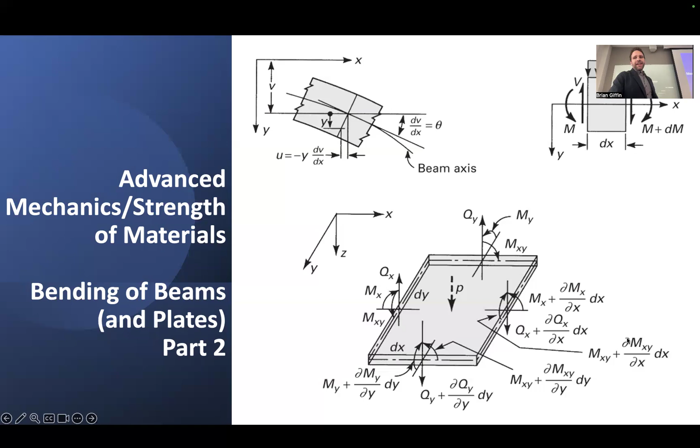And I want to just recall some of the things that we looked at in the context of idealizing these beam and plate theories, simplifications of the more general theory of elasticity. We looked primarily at, if we're really only concerned about deformations of beams and the cross-sectional deformations are really not so relevant, then it suffices to just look at what's the deformation of, let's say, the centroidal axis or the neutral fiber of some beam, and we can parameterize that in terms of some axial coordinate x, and we can represent its transverse displacements in these two transverse directions, y or z, as a function of axial position x.

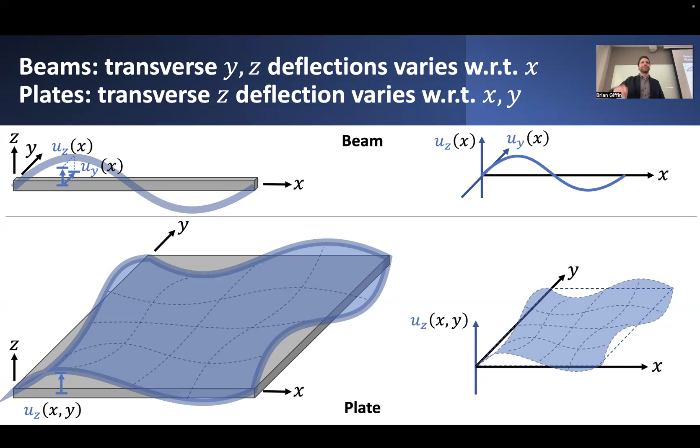In the case of plates, all we had was this transverse deflection in the z direction, but which varied potentially as a function of the in-plane coordinates of the plate, as functions of x and y. So really what these functions represent are deformations or deflections of the midline or the centroidal axis of this beam and the mid-surface of this plate. Not necessarily saying anything about what are differential displacements of points on the top surface or bottom surface. Really, when we're characterizing relatively thin beams or plates, we can just isolate attention to what's happening to the neutral fiber or the mid-surface of a plate.

From those descriptions of what's happening to the neutral fiber or to the mid-surface of these plates, we could describe what that deformation looks like, maybe in profile, and we could characterize different aspects of how these transverse deflection fields varied as a function of either axial coordinate or in-plane coordinate. We could take derivatives of these quantities to compute things like what's the slope of this deformed neutral fiber of this beam, or what's the slope in maybe both the x and y directions of this deformed section of the plate under these different forms of transverse deflection. And we could also look at what's the resulting curvature of these small sections or segments of a beam and plate under these different loads.

So we could define things like overall inclination or slope. We could then relate that to the resulting curvature in these beams. And we could define them basically as derivatives of these transverse deflection fields. And principally, we invoked this assumption of plane sections remain perpendicular to the neutral fiber in the case of Euler-Bernoulli beam theory in order to relate the resulting rotation of a given section to this transverse deflection field. And we enforced that assumption by basically insisting that transverse shear deformations that might occur internal to this beam are relatively small.

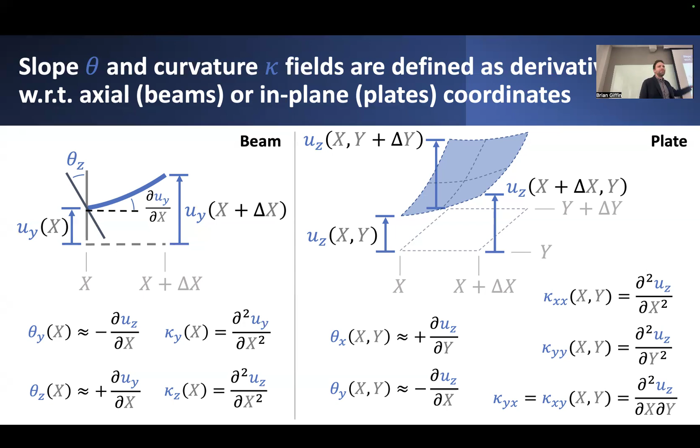And in that way, we were able to relate the rotation of a given section or the rotation of a given fiber in a plate to the resulting slope or inclination of this beam or plate. And once we had those relationships, we could go one step further and finally establish our final kinematic relationships linking the resulting curvature of a given beam or curvature of a given plate that involves now 3 different curvature quantities.

We could relate curvature now to how strain varies through the depth of a given beam or plate. In the case of beams, we noticed that the axial strain in any given fiber, measured using some kind of relative distance from this neutral axis, we could measure what's the strain in this fiber given its coordinates, and it can be expressed as basically a linear function that depends on the curvature. Both values of curvature in bending due to displacement in either of the 2 transverse directions.

In the case of plates, we found that it wasn't just axial strain that we were interested in, but rather we were looking at this more general case where we might have, let's say, a small chunk of this plate. We can cut out of it some kind of cube, and we can look at any particular slice of interest through the depth of this cube. And we noticed that on a particular slice, that slice will undergo some kind of in-plane strains, axial strain in the x direction, axial strain in y, and maybe also some shear strain.

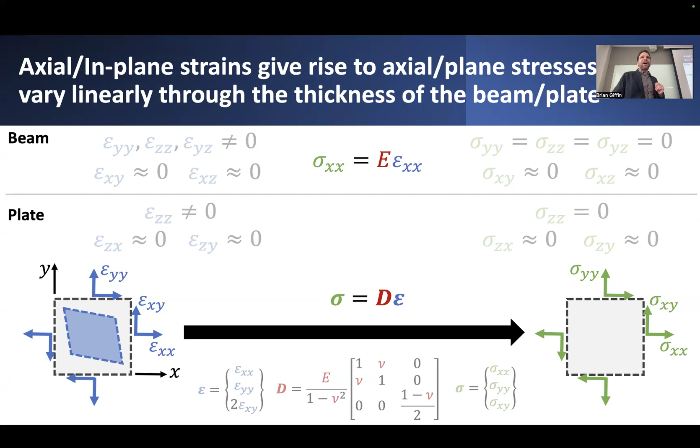So instead, we actually take a page from the theory of finite elements and how finite elements go about discretizing problems and simplifying things, instead choosing to express equations of equilibrium not in terms of point-wise statements. At every point on this cross-section, we have to satisfy equilibrium? No. Let's make it simpler. Rather than trying to describe equilibrium in a point-wise sense over the cross-section, let's try to describe it in a homogenized or section-averaged perspective of equilibrium.

So rather than saying every point has to satisfy equilibrium, let's say that in an integral average sense, over the entire cross-section, can we maybe try to satisfy equilibrium in that kind of homogenized or average sense? So in order to do this, we have to take our resulting stress distribution, which might vary as a function of depth through a given beam or as a function of depth through a given plate, and we can compute what I'll call stress resultants.

Stress resultants are really integrals of the stress, which varies as a function of depth through a given beam or some such. It's the integral of that stress multiplied by some other function. It doesn't really matter for the purpose of this analysis exactly what that function is. We could just make it a constant, in which case the integral of just a constant times the stress over the cross-section gives me the average stress over that cross-section.

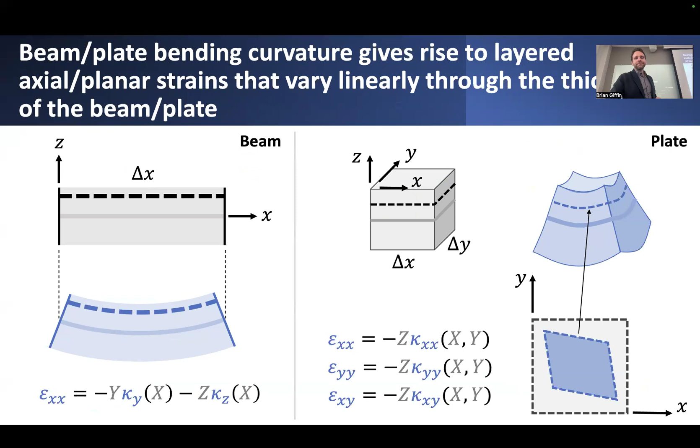I can take my description of strain in terms of my bending curvature, which, again, comes precisely from the assumed deflected shape of these beams or plates. From curvature, I get strain. From strain, I get stress. And from stress, I get these stress resultants or moment quantities integrated over each of these different things. And I can assemble all those different relationships together.

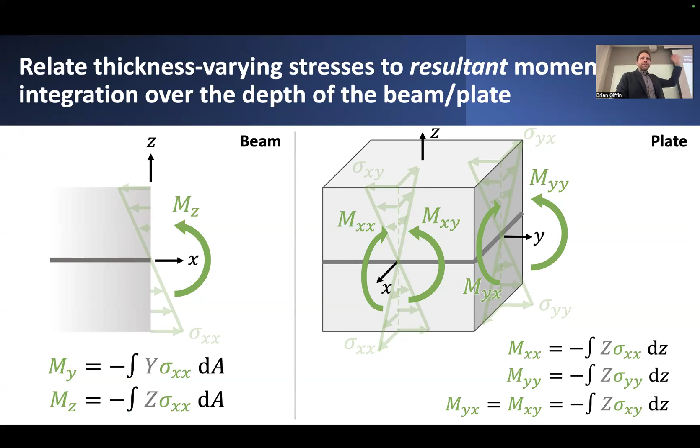Curvature to strain, strain to stress, stress back to stress resultant, and put them all into one combined statement to make things a little bit easier to swallow. And in the end, it looks hopefully a little bit familiar to you. In the case of beams, it looks something like this, that the resultant moment acting on a cross-section is equal to E, that kind of parameter that comes from our stress-strain relationship, I, which is the second moment of area of that particular cross-section of interest, and kappa, the curvature of this segment of a beam.

So I have what I'll call the moment curvature relationship for a given beam. And it's a little bit complicated. I'll break it down exactly what I mean. You're probably used to seeing this in terms of scalar quantities, where m, moment, is really just one quantity. Kappa is also just one quantity. Same thing, moment of inertia or moment of area is also just one quantity. So if you wanted to, you could just express this as just one function.

I'm actually representing this in terms of treating moment and curvature as potentially vectors that have two components, accounting for the fact that I might have displacements in either of the two transverse directions, in the y direction or the z direction. And similarly, I might have stress resultants bending about the y or z axes due to deflection in the y or z directions.

And the relationship between these components of bending curvature in the y or z directions and bending moment due to those displacements in the y or z directions is not so simple as just saying, okay, well, bending moment y is somehow directly related to curvature y. Bending moment z is directly related to curvature z. It's actually a little bit more complicated than that.

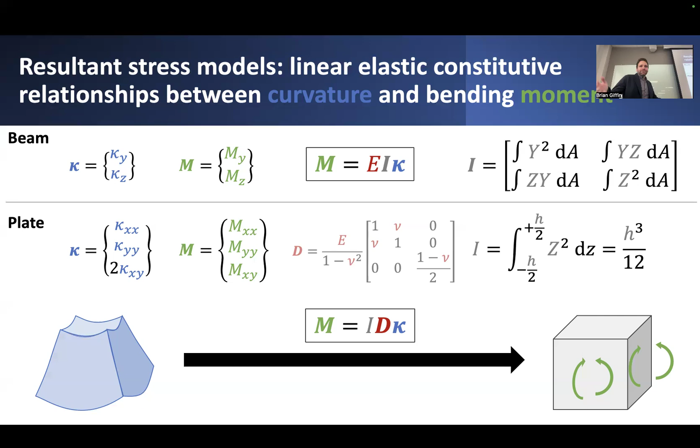So an alternative approach to circumventing this issue of what do you do when you encounter a cross-section that has a non-zero product of inertia, which happens commonly if you have non-symmetric cross-sections? Well, we can go back to chapter 1, our discussion of how we deal with tensors, and in particular, how these components of tensors change as we change our perspective, as we change our frame of reference. And this is particularly relevant for stresses, for strains in a two-dimensional setting, but it applies equally to this notion of inertia treated as this two-dimensional tensor quantity.

I can take the components of my inertia tensor, originally represented with respect to some particular chosen YZ coordinate frame. I can compute all of its different components. I can assemble them into this 2x2 array. And let's say in the case of this example, maybe I find that it's much easier to compute the components of this inertia tensor with respect to this coordinate frame. But I really want to know what are the components with respect to this coordinate frame. Could I compute everything with respect to this frame and then take all those components and transform or rotate them to express them instead in terms of this different coordinate system?

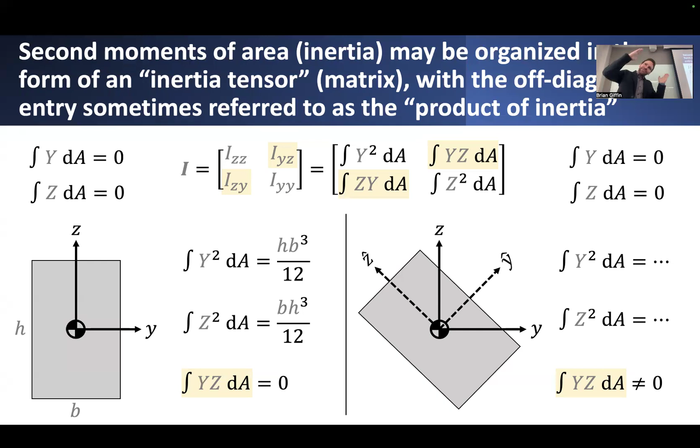And the way that we do that is in the same way that we rotated stresses. If we had stresses defined on some block of stress, and we knew the different normal components of stress and shear stress acting on the faces of that block, but instead we wanted to know the resulting normal stresses and shear stresses that act on a similar block in a different coordinate frame, rotated by some angle theta, in order to do that transformation, we can do exactly the same transformation by taking that inertia tensor expressed as this 2x2 matrix and then left and right multiplying by some rotation matrix, where this rotation matrix has components expressed in terms of sines and cosines of that rotation angle theta.

I won't go through the details of exactly how you carry through all these matrix multiplications to figure out the specific components of this rotated inertia tensor and how they relate back to the components of the inertia tensor represented with respect to some original chosen coordinate frame. But you can go through the process. You can even just go into chapter 1 of your textbook, and it basically uses exactly the same formulas that you use to transform components of stresses from one coordinate frame into another. So that's one way you can get around this problem.

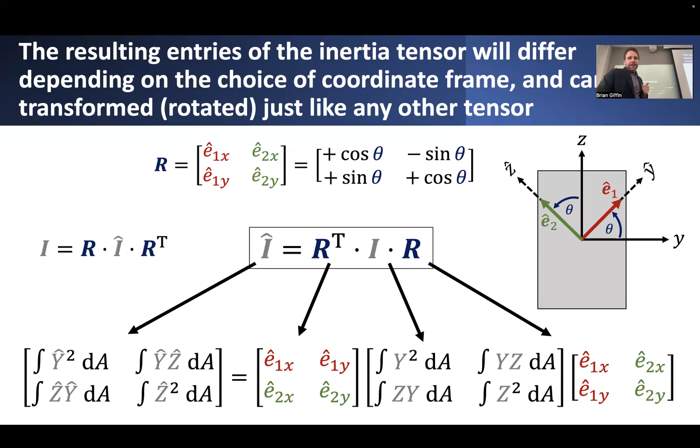It's convenient sometimes to compute the inertia tensor with respect to some preferred or chosen axes, particularly symmetry axes, if the section exhibits some kind of symmetric behavior. But even in the most general case, where maybe there aren't specific axes of symmetry for a fairly general cross-section, as you might have in the case of this kind of L angle section, which is particularly relevant for that homework problem, it so happens that irrespective of whether this section has a coordinate frame in which it exhibits symmetry about reflections about the y or z axes, it actually doesn't matter. There is always some coordinate frame in which I can choose to rotate my inertia tensor by some specially chosen angle theta.

And it turns out that I can always find this coordinate frame in which I basically decouple these kind of products of inertia and end up with just a strictly diagonal representation for the inertia tensor. In that particular coordinate frame, you can think of these diagonal entries of this rotated inertia tensor as being kind of like equivalent to the principal stresses in some representation of a two-dimensional state of stress.

In that context, they were representative of the strictly normal stresses that would act on some kind of block of material, assuming that the shear stress acting on the faces of this block in this rotated frame are equal to 0. In the case of the inertia tensor, it basically implies that the product of inertia is 0 relative to this specially chosen rotated frame. And the values that appear on the diagonal are sometimes called the principal moments of inertia.

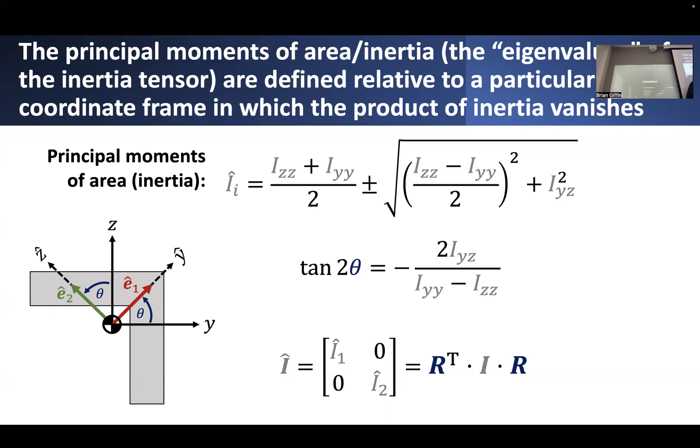So these principal moments of inertia, you can use this formula to compute them, given some particular values of the product of inertia and the moments of inertia that are computed relative to some arbitrarily chosen coordinate frame, just for convenience maybe. But you can always find this special rotated frame in which this condition is satisfied. And really the benefit of doing this is that, let's say you wanted to solve this problem as presented in the homework. You had some beam, you had some kind of transverse loading that was nicely aligned with the edges of this cross section and everything.

But we recognize the fact that if we tried to solve this problem, we would actually have to acknowledge that if we had loads acting, let's say, directly in the z direction, that's certainly going to generate deflections downward in the z direction, but it might also cause deflections laterally in the y direction, somewhat paradoxically. And again, that has to do with this coupling effect, that because this section is non-symmetric, because its resulting product of inertia relative to this coordinate frame is non-zero, deflecting this downwards and applying some vertical load will cause it to bend in this opposite direction.

We could do that by, again, computing this relationship between both components of bending curvature and both components of resultant moment through this general tensor relationship, or we could just treat it as a totally decoupled problem and instead choose to solve this same problem, not with respect to an original YZ coordinate frame, but instead with respect to this special coordinate frame, in which there's no coupling between out of plane deflections and vertical deflections relative to this plane. It does mean, however, that we have to change the direction of loads such that it can be represented with respect to this rotated frame.

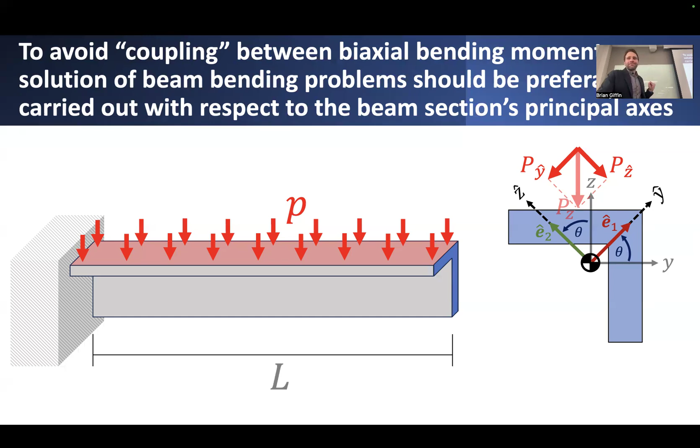So now that we've talked about how we relate bending curvature to bending moment, the last step of all this is still to come up with expressions for equilibrium.

We've reduced our descriptions of the state of stress over a cross section or through the depth of the plate, not in terms of pointwise statements of stress, but now instead in terms of these stress resultant quantities, in terms of bending moments.

But to really go the full distance of enforcing equilibrium, we really have to describe equilibrium now in this kind of more holistic sense, taking equilibrium not necessarily relative to a small chunk of material, but equilibrium with respect to some kind of finite slice of a beam, considering all the forces that act on it, any transverse loading that might be applied to it, whatever internal shear forces might act on each of these cut faces of this cross section on the left and right hand sides, and whatever internal resultant moment generated by the relationships that we previously established.

The challenge here is the fact that we don't really know what this resultant shear force is. We have a relationship between axial stress and the resultant moment that acts on a particular cross-section of a beam. But for the shear force, we've kind of fudged things in a way that doesn't give us any immediate answer to what this should be. We've said that if we're assuming that shear deformations are small and resulting shear stresses are also small, then this is just practically zero. That's not true, obviously. For this to be in equilibrium, there has to be some kind of shear force that would keep this whole section of the beam in equilibrium.

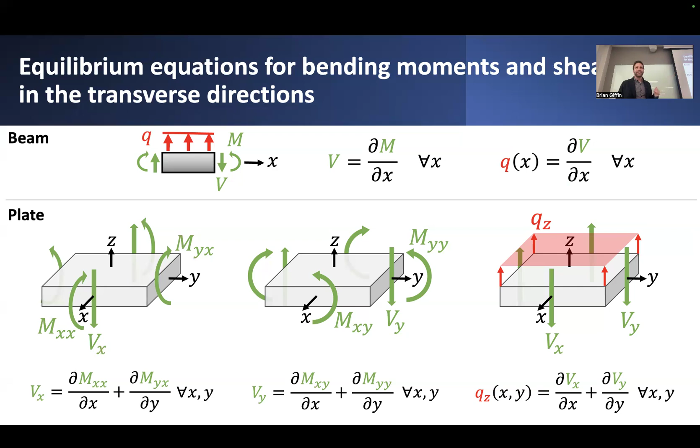Now the question becomes, well, given the shear force, what exactly is the distribution of shear stress that might act on a particular cross section? To figure that out, you actually have to go through a little bit of a complicated exercise. And again, it actually comes down to posing a statement of equilibrium to figure out exactly what is the shear stress that might act, not necessarily on an exterior face of this cross section, but we'll do something a little bit different.

Suppose I have a small section of a beam placed in some kind of state of pure bending. So it has maybe some bending moments applied to its ends, and they might not necessarily be perfectly balanced. Let's say they differ by a little bit, owing to the fact that this section of the beam has some finite width delta x. All right, given this assumed homogeneous chunk of material for this beam, I could carefully go the opposite direction and say that if I happen to know, or somebody gave me what these bending moments were, I could invert my relationship between bending moment and the resulting stress distribution in this cross-section and assume that it's just going to vary linearly through the depth.

In that case, I can basically say that the axial stress distribution is going to vary as a function of, let's say, depth coordinate z relative to the neutral axis, and it'll look like Mz divided by I. The familiar formula that you've probably heard a million times. Now, given this assumed linear distribution of stress through the depth of this beam, I can do something kind of fun. Rather than considering equilibrium with respect to vertical forces applied on the edges, I could consider instead taking a small cut through this cross section of this beam. And instead of cutting it transverse to the beam, I actually cut it longitudinally.

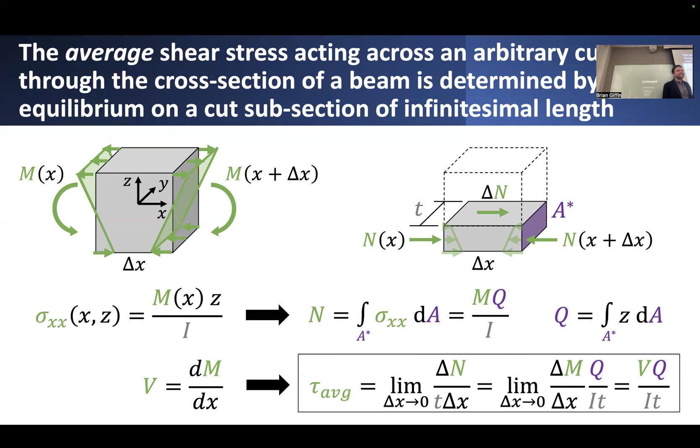So very nicely, without even having to worry about the particulars of how we figure out all these relationships between strain and stress for shear strains and how they vary over the cross section, we've expressed it entirely in terms of equilibrium.

Now, the one challenge that this introduces, particularly if you're looking at non-symmetric cross sections, and this relates back to that particular homework problem that I gave you, is that you could do this exercise of choosing a particular chunk of this cross section, making an arbitrarily chosen cut through it, and looking at equilibrium as posed on this subsection of the cross section.

Based on this longitudinal cut, you can figure out the shear force or shear stress that acts across this longitudinal cut, which is proportional exactly to the shear stress that acts on the face of the cross section at that cut point. And you could continue to take different cuts and look at how the shear stress varies as you choose different subsections of the cross section, going along the full length of this thin open-walled cross section.